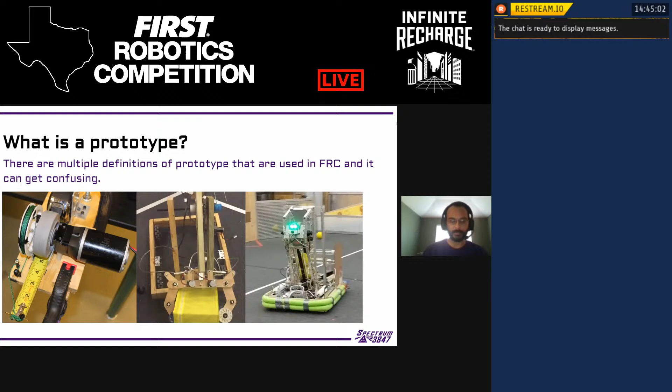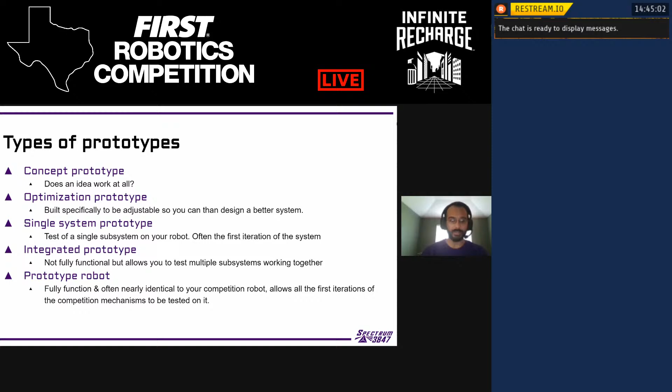So some of the different types of prototypes, when I was trying to categorize it for this presentation, when I think of different things that people have called prototypes over the years, one of the things we do for Spectrum at the very beginning of the build season is we'll have concept prototypes where someone has an idea, they think maybe that's how something might work, but they don't really know, right? We don't know if it's going to function that way. We're not trying to necessarily design something around it. We're just trying to figure out, does this idea work at all?

What can we play with to get where we need to be to then actually start working on a design and pulling forward and learning about that specific design afterwards. And we'll go through these in more detail in a second.

An optimization prototype is something that's built to learn a very specific thing about a system. So they can have a lot of adjustability built in, and you can set variables and things. They look very different than what would be on a real robot because you might have a wide range of adjustments and things. And it's kind of like a test fixture or test jig.

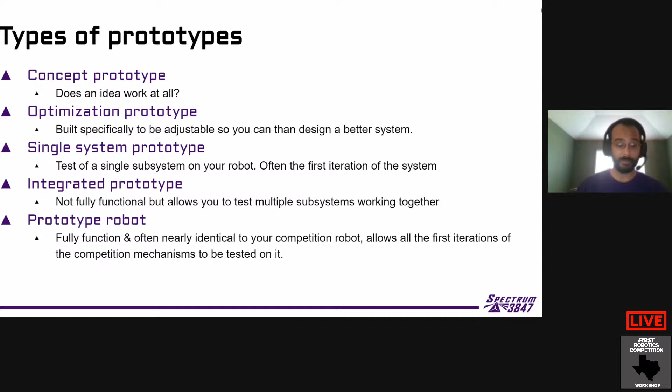Single system prototypes start looking more like something that would actually be on a robot, but they're often built faster, they're built quicker. An integrated prototype is going to have multiple systems connected together. And then the full prototype robot is normally like a full functioning robot. It's just not built as well as your competition robot.

So for a concept test, a lot of times you're doing things that you're not putting a ton of thought or planning into as much as just trying to get something done so you can learn about the system quickly. Yeah, just trying to get a general feel for the problem. You're not really designing in a ton of adjustment. You're not planning to use this for very long, right?

It may be something that gets put together one day, tested the next day. Maybe a few minor adjustments get made to make sure whether it works or not, especially if it doesn't work the first time, which most of the time it won't. But it's not going to be something that you're really collecting a lot of data for. It's not like a scientific instrument at all.

This is our 2013 frisbee launcher as an example of something I would consider a concept test. There had been some videos of other shooters tested that were all using pretty large wheels. They were using like 6-inch or 8-inch pneumatic tires to shoot these frisbees. And part of what we were hoping to be able to design was a smaller shooter to fit in a smaller space on our robot. So we needed to build out a concept test to test whether we could actually launch a frisbee from the distance we needed into a goal with smaller wheels.

So one of our students put this together with basically a couple VersaPlanetaries and motors, some wood, and a little bit of Lexan that was just scrapped from other projects, right? None of this was cut to precision. None of this is really mounted all that great. There are a few measurements to make sure the frisbee is going to touch the wheel and things like that. But there was no CAD, there was no planning, nothing like that. There's no base for it.

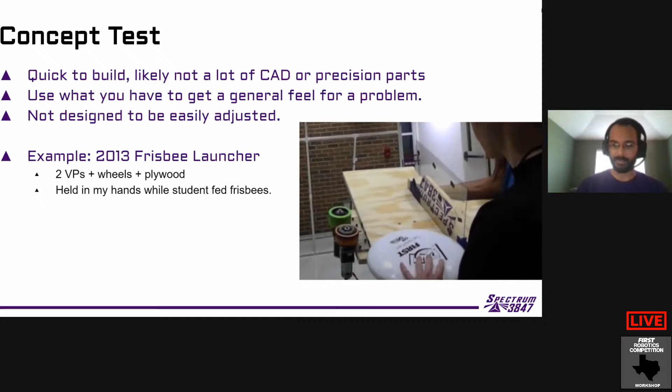I'm literally in this picture just holding it in my hands while a student feeds a frisbee through. And I think the motors are just running at full power. There's no speed control at all. So with a lot of these things, there's not a lot of finesse in the concept test. We're just seeing if it works.

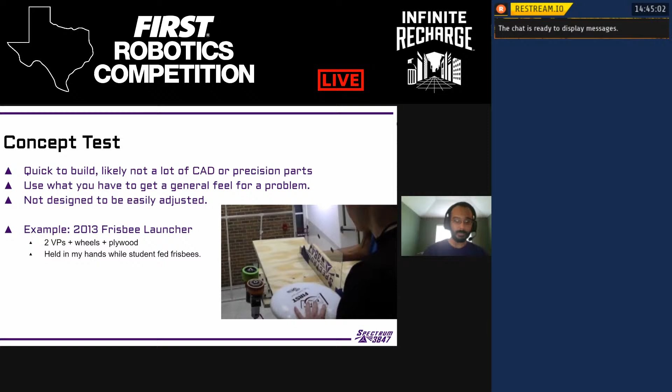The next level up from that is more of an optimization prototype, where we're trying to test a number of different variables and finding which one of those variables is going to lead to the best results, or at least get us closer to the best results. One of the most common things you're testing with an optimization prototype is something like ball compression. It's very hard to just intuitively know exactly how close your wheels need to be together in a shooter or in an intake. How much can you squeeze the ball and pick it up?

So often you need to test that, but it would be very annoying if you tested at 6 inches and that was okay, and then you had to build a whole other version to test at 6.5 inches, and a whole other version to test at 7 inches. That would be a really slow process. So some sort of optimization prototype, test fixture, or test jig allows you to design in all of those ways to adjust those variables.

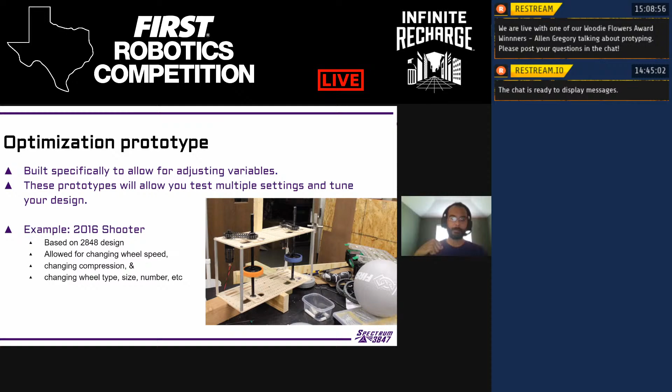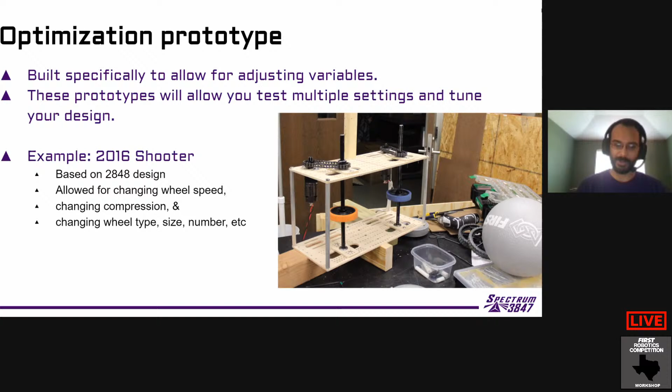This example is a 2016 shooter prototype that we built. It was based on a design that Greg Nadell did for 2848 at the time, I believe. This is a while ago, so I think that's all correct. And it allowed us to easily change wheel speed. We had 2 VersaPlanetaries mounted on there, so we could change gear ratios, but we could also change sprocket size up at the top. So those are those chain paths.

And there were slots so we could move the motors around to get the chain tension right. So even if we swapped sprockets, we could still get chain tension reasonable for the prototype. And then the hex shafts running through it allowed us to very easily change the wheels. So we could pull the hex shaft out and put a different wheel on.

We could put multiple wheels on. We could change the spacing between the wheels. And we could also change the diameter of wheel because we could have a different wheel size. And the way the bolt pattern is set up, you could change the distance between the wheels, I believe on like 1/4-inch increments going out. So we could have 5-inch compression, 5 1/4, all the way out to however much we needed for that test.

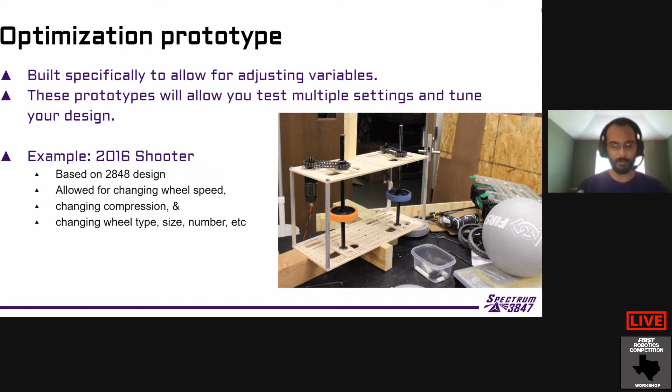We ended up not building a horizontal wheeled shooter, but that test fixture kind of allowed us to do some of those testing things and kind of get in the right ballpark if we wanted to end up building that. As we move up, you get to things that are much closer to what they would really be like on the robot. These are like our single system prototypes.

This is what on Spectrum we have. We divide up into subsystems that we have either a person or a pair of people working on. They're kind of leading it, managing that whole process, and so they'll manage their single system prototype pretty early. That's one of the big milestones of the project, getting to a single system prototype, and seeing how well you can get that to function nicely and what you can do to test it.

A lot of the critical geometry is going to be similar to what you would expect to find on the robot. So in some of the other optimization tests, you're building out a pretty wide range, right? You don't really know what's going to be on the robot. Here, ideally, you have already figured out something close using some other test method. So you're building something that you don't think you'll have to change a huge amount.

Ideally, maybe the roller's a little tight in your next version, you expand it a little bit, but it's not going to be 2-3 inches off. It's going to be within some small range of adjustments. It's also similar to how you package it on the robot. So the example is our 2019 cargo intake.

It definitely looks a little odd here, but we had to build up a geometry out of wood and things. A lot of these panels were all replaced by Lexan, and they weren't mounted the same way on the competition robot, but largely everything is in the same place. So all the rollers are the same distance apart. They each have their own motor that's able to spin them.

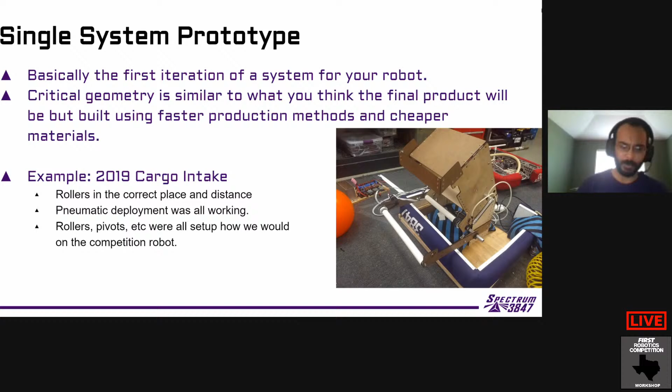Another type of prototype is more of an integrated prototype. So when you're trying to figure out how multiple systems are going to work together, and not each system has to be at the same level of complete. So in this example, our 2018 intake, one of the things we realized was we were building this big arm that was going to come over and be able to intake on both sides of the robot, and the intake would have to be in this different angle position.

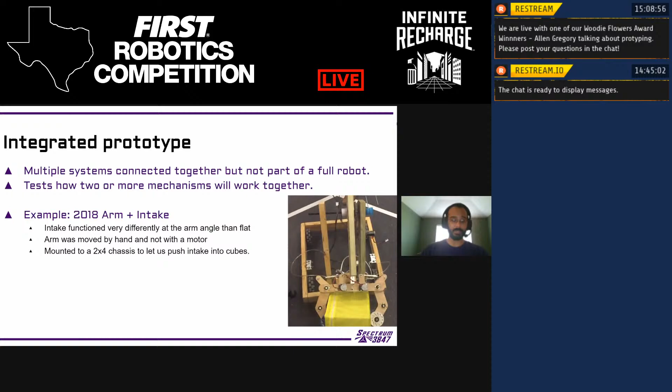So we were able to build up this very quick chassis. It's just made out of 2x4s. It has some bolted in shafts that we put Omni wheels on, so we could roll it around. We could push the whole thing into the cube to test how the intake worked by actually mimicking that we were driving it into the cube.

And then we could take our hand and move the arm. So we could flip the intake over to the other side, see if it worked reversed, see how well it picked up the cube, how much it held the cube. So we could shake the arm: was the cube going to fall out of the robot? And we could test all of those things. So the intake itself is pretty high fidelity. A lot of those panels ended up being very similar to what we cut out of polycarb for the real one.

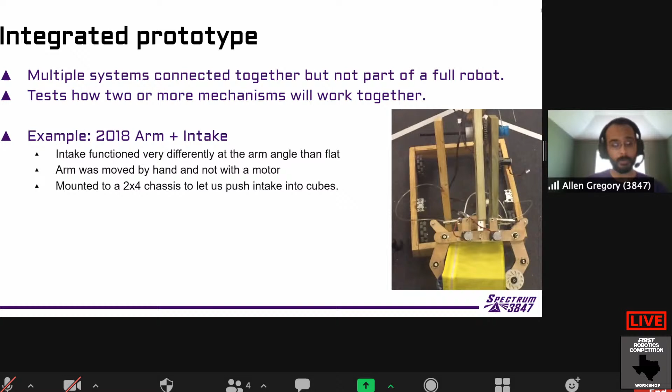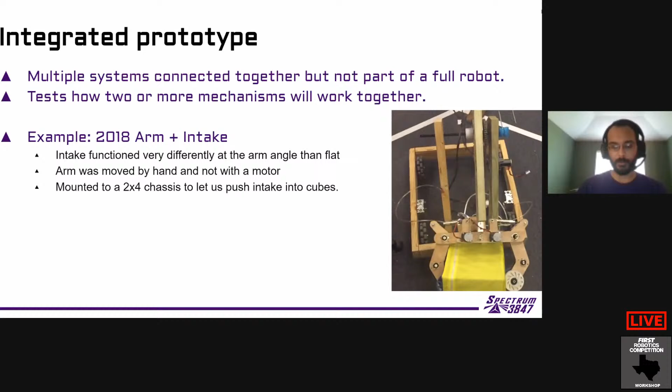But the arm and the chassis are all very low fidelity. They don't look much like the robot actually looked. They're the same general shape and size, but we weren't too worried about getting everything right there because that wasn't what we needed to test, right? We needed to test that intake angle and all those things. So that part we did get right as much as we could, and tried to make sure that the intake was going to work the way we wanted it to.

And then the full system, everything, is a full prototype robot, which doesn't always get called that. Sometimes they're people's practice bots, but some people also build their practice bot after they build their competition robot, where this one specifically is used for a lot of testing. So this was in 2020, one of our first years of basically intending to build a prototype robot. It kind of happened mid-season.

We were building along and we realized there were a lot of things we needed to get fully built into the package it was going to be on the robot to be able to test properly. And we needed to do it quickly without waiting on the competition robot, which always takes a little longer because there's paint. The electrical is always much nicer on the competition robot because we're way more worried about reliability there. A lot of the parts take longer because they're made out of materials that take a little bit longer to machine sometimes.

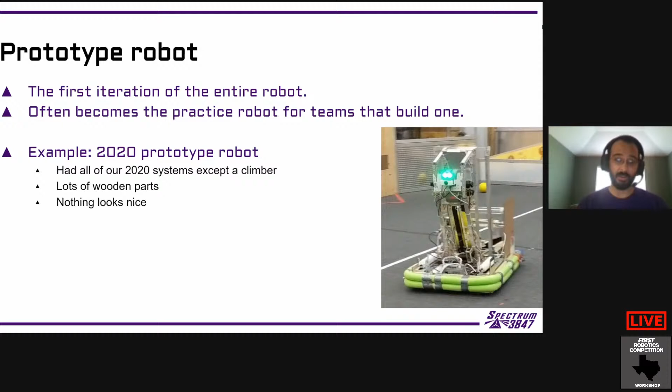But this prototype made our competition robot way better because we could test the full integrated system and make sure our shooter was doing what we wanted. We could build multiple versions of the hood onto it. We could do a lot of things on the full prototype robot that would have been a lot harder to do with just an integrated prototype. Some of it would have worked, some of it wouldn't. So having it was very useful this year.

Okay, so we're going to go through some of the general concepts now that we have an idea of the different types of prototypes.

So I think I may be misquoting, but I believe there's a JVN quote that is something along the lines of, you don't have to prototype everything, just everything you want to work. And that is largely true for a lot of systems, right? I would never want to design and produce an intake and just take it to competition and assume it worked. Anything that's going to interact with the game piece, anything that's going to interact with a lot of the field, it's going to be very hard to do that.

But there definitely are times, and there definitely are times for different teams, where it does not make sense to prototype. So if there's a problem that you and your team understand very well, and you're confident that your first version of the final design is going to be sufficient, that you can tweak from there without having to very quickly replace the whole thing, right? That's ideally what a prototype is doing.

So you don't have to completely overhaul your actual competition robot, which normally costs a lot more, takes a lot more time, and you can do it out of quicker materials and things. That's why we do a prototype. For things like an elevator, it may not be necessary to build a wooden elevator or something like that, right? As a team, you have to decide, what is this prototype going to really teach you or help you learn or change about your final design?

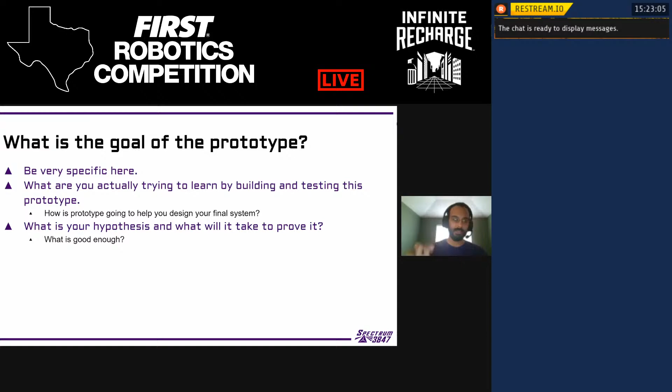Because there's tons of ways to intake a ball, right? But you have to figure out, okay, this prototype is going to be designed to make sure we can intake multiple balls at once, or that we can intake balls into a specific part of our robot, or that we can do it at this speed. There's all sorts of different things you can start listing, right? Some of that is in your strategy discussion that happens at the beginning of the season when you start figuring out what things you want your robot to actually be able to do.

Just building an intake prototype is normally not the right answer, right? You need to be building an intake prototype that does what you set out to do and proves what you set out for it to prove. Kind of along the similar thing of knowing what your actual subsystem and what part of your robot is going to actually, what design requirements and design constraints is it going to actually have to meet, right?

There are game rules and robot rules. Your build schedule, like how often do you meet, all those things. You could design in CAD an awesome prototype, but if you don't meet often enough, or don't have the right tools, or don't have the right materials, or it's just too late in the season to do it, there's all sorts of reasons why a prototype may not be useful if it doesn't meet the constraints you have across both the robot itself, but also your team.

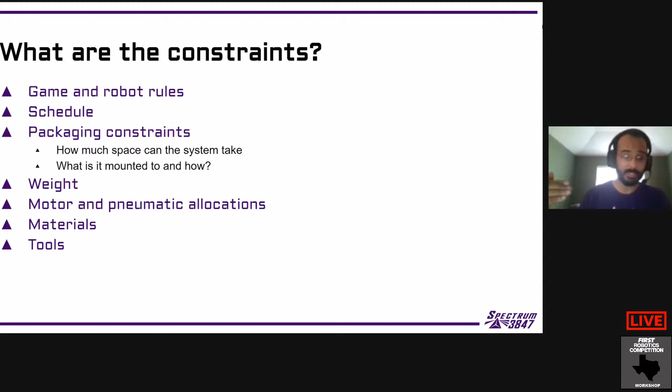Right? There could be an awesome climbing system, but it ends up weighing too much. So then that prototype wasn't useful because you weren't looking at the weight constraint for how much weight you actually have to be able to put this climber in place. Motor and pneumatic allocations are a similar way. If you don't have enough motors left over on the robot for your system, it's not going to work out, or you may have to change another part of your robot to change some of these constraints, right? Maybe your prototype can't get down to weight, or can't get down to the packaging constraints. Then you may have to move something else or change something else to allow it to work.

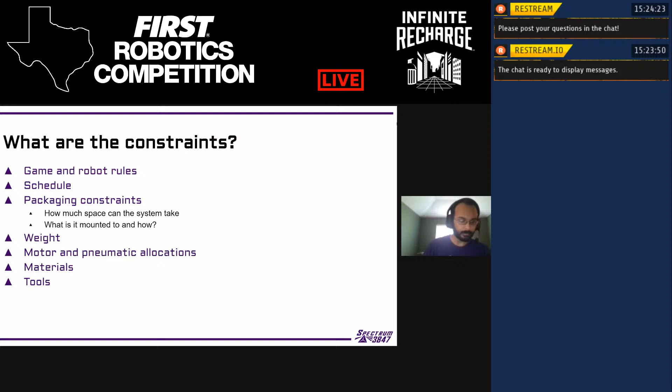Okay. This is probably one of the ones that I think not necessarily a lot of teams, but a lot of people miss with the idea of it being attached to prototyping. Because a lot of people do this type of thing kind of early in the season. Well, they definitely will look at a different robot, right? It's a shooting game in 2020 and 2021. So a lot of people did look at 2016 robots or 2012 robots and we kind of saw these different examples, but they may not have done a lot of research into the specific prototypes that were built from those years, right? How did they go about actually doing the testing, not necessarily just what their final product looked like?

There are a lot of examples of those types of things in old Chief Delphi threads, and a lot of teams will talk about them in some of their videos. So watching some of their final robots also helps. So things like the Behind the Bumper series that Fun does, those have a lot of detailed looks into different robots. So you can see kind of different designs. Tons of teams post their CAD models.

Recently we collected a lot of them in a Google Sheet. So if you go to cadcollection.spectrum3847.org, you can see, I think it's like 800 something robot CAD files right now. So you can dig through a lot of old robots and see how they build their robots. So you can get a lot of information without actually having to build a prototype first, right? Or even do a concept test, right?

If you can find somebody else who's proven out the thing you're trying to learn for you, you don't have to do the work. And then your work and your energy can be put into improving it and iterating it and making your final design better. A lot of published examples, things like the Open Alliance, which Spectrum is a part of, and a lot of other great teams where we're putting out kind of a lot of what we're prototyping each season, our final designs, all sorts of resources for you.

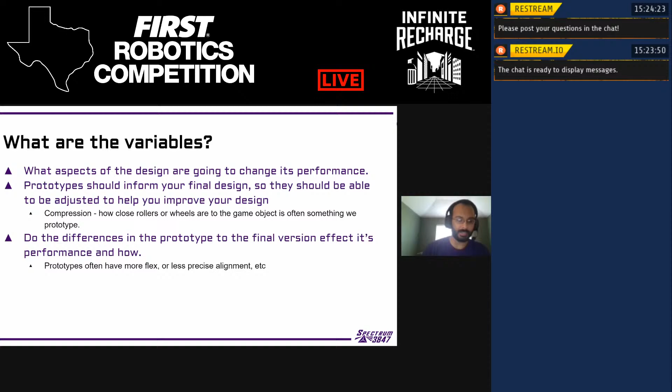So you really want to notice whatever the differences in the prototype are compared to the final version: is that going to affect its performance, and how? Flex is a big one. That's one that bit us this year, and we had to do a lot of tweaking on our hood pretty late in the season to get it right.

There's a lot of less precise alignment if you're not putting things together as accurately and as well as you would on your final version. A lot of little things can be tweaked on a prototype that aren't going to transfer to the final version, and that may cause you to not get it right.

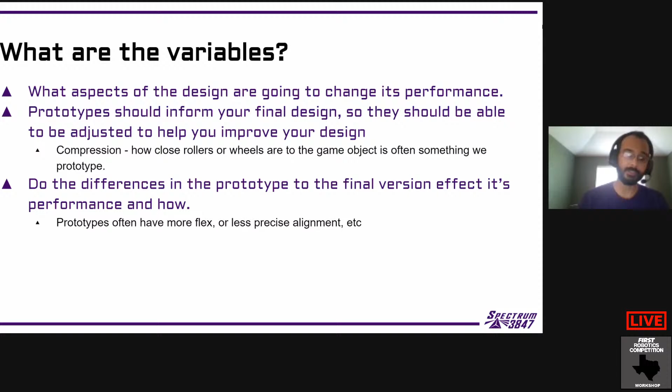In general, for your prototype, you're finding good, not perfect. Because there are going to be differences, like I said, there's going to be flex, you're not building things of the same materials all the time. If there is something that needs to be kind of perfect on your robot, you probably need to design some of that adjustability into your robot.

So you can design it to where you can change your shooter speed because you have different settings in the control system, or you can change your hood angle in some way by dialing something in. You can change hard stops and things to change exactly where your intake falls. There's all sorts of little things you can do to tweak your final version if there's differences between your prototype and your final version.

But you definitely have to think about those during the design process of your final version to get it right, to know, okay, maybe the prototype isn't quite right. We'll be able to tweak this a little bit in this range of values, but the prototype's close to right.

Another very important thing, and I feel like this is also one that not a lot of teams do all that well, even with all the documentation we do, we don't do it as well as we should. Documenting the prototyping process, making sure you have good photos, videos, and a lot of notes from the time you're actually doing the testing, along with those measurements, helps a lot, especially later in the season.

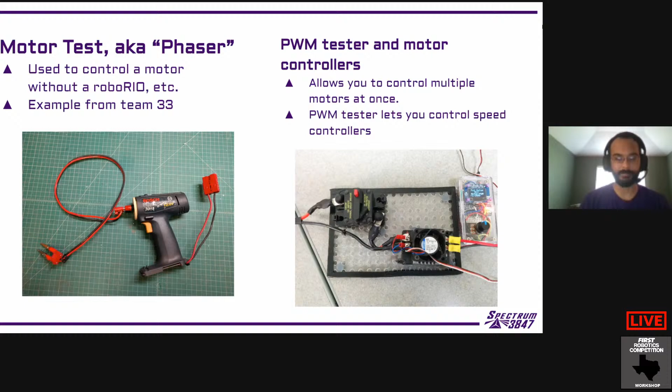So we use that a lot for shooter testing. So if we just need to be able to lower or speed up multiple motors attached to a shooter, we'll plug that in, and it has 3 speed controllers on it. We can just turn a dial and set our speed pretty easily. And most of it's all used parts plus the $10 servo tester or whatever it is, which allowed us to build that up, and we use it basically every season for something.

Another one is a pneumatics test panel. So having some way to test pneumatics functions. So if you are building and prototyping an intake that's going to fold down over your bumper or something like that, you want to be able to quickly have a solenoid that you can control back and forth and push air down or let air up, right?

Because if you build an intake that in an actual match is going to come down with air and be held down with pneumatics, but instead you build it completely rigidly, now that joint that would be moving up and down can't at all. So it's going to intake differently than if it actually had the same pressure pneumatics pushing it down over a bumper like it would be on the real robot. So again, you want to get that fidelity right. So one of the ways to do that is to use the pneumatics there and test the whole mechanism.

A lot of the solenoids will have buttons you can just press, so you don't have to have them set up to anything with electricity. You don't have to have a PCM or anything. You can just get the compressor running, get it charged to a state that's reasonable, push the button, and the pneumatic will move in and out.

We'll often also use an old robot, even like last year's competition robot. We know it's working well. We'll unplug, we'll get an air line from it, get a solenoid, and plumb it that way. So we'll have last year's competition robot running up on blocks somewhere. We'll turn it on, and we can test just using that as the air line.

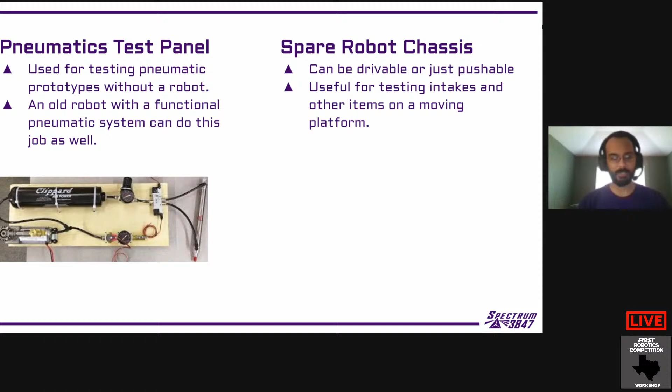So even if you've ripped a lot of the electronics off of past robots to move on to next year, you can keep the frame and some of it around. Even if you take gearboxes off, if it has wheels, you can push it around and it can still help you out.

Okay. A couple of the more recent tools that have been developed, one of which we'd started working on 2 years ago, I want to say it was in the fall of 2018, is Spectrum Protopipe. I'm not going to go into all the details, but if you go to protopipe.spectrum3847.org, you can see the full document and it explains it. It has all the downloadable files, so you can 3D print the connectors.

But basically it is a system of 3D printed connectors that allow you to connect PVC pipes with either wood screws or clamps. And you can very quickly build up different prototype concepts and different concept tests, or tests for different variables and things too.

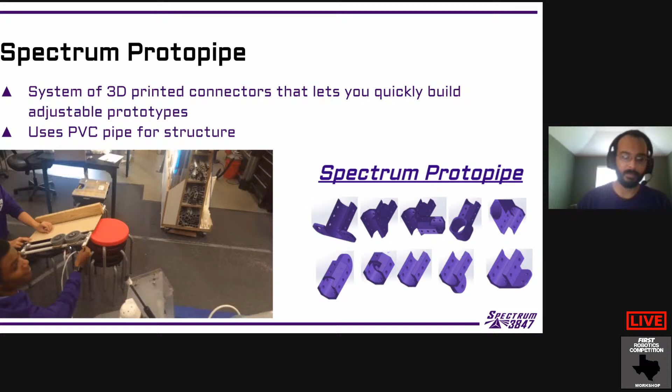This 2x4 back here is actually on rails as well, so we could slide it if we want to change the compression. So you could do a lot of different changing on the shooter without having to build a new one. You could start learning more about the problem here.

Another example, this one was built up to mimic the 2010 game, FRC Breakaway, where you had to have a soccer ball in your robot, but you weren't allowed to actually bring it in your robot. You just had to roll it, or you had to have it in the front of your robot. So we had two different rollers here. They were just powered by drills, so we didn't even have FRC motors on these ones. And these pipes are just spinning in those connectors. So we could get a concept test built up relatively quickly.

We had all the parts ready. We have a big bin of the connectors printed. They don't cost very much; they're just printed out of PLA. And so we can get this test fixture set up pretty quickly, or we can do some of the adjustments on it. You can slide these different bars into different dimensions, slide them to different heights, and start figuring out the problem a little bit through this. Then we might need to build something a little bit more robust to figure out the exact variables everywhere. And then we would get into our first iteration of our system prototype as well.

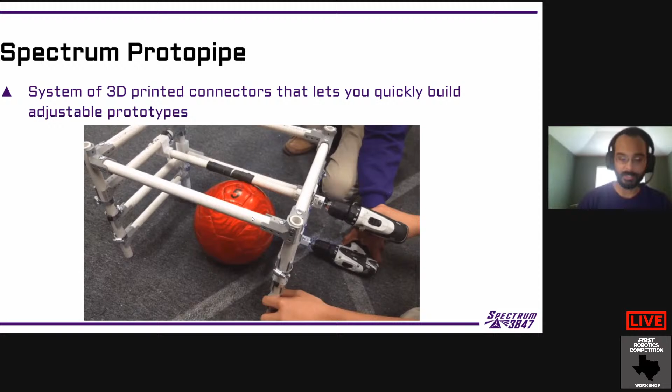Another very cool 3D printed project is called HYPE Blocks, from 5254. They have a mentor, Max, who helped design these. We used them this year for a shooter concept. We needed a prototype to let us spin up multiple different wheels and get everything actually spinning up to velocity. And this way the HYPE blocks have better bearing setups and can be a little bit more rigid on the 1x1 aluminum extrusion.

So again, a lot of the prototyping stuff doesn't have to be expensive. We had a 2x4 frame that we built up, just 1x1 extrusion, and some clamp pieces. All of this was being controlled by a past test chassis that we had, because we needed to have brushless motors. So there was actually some code involved with this prototype because we wanted to get good wheel speeds. So we were doing velocity control on these wheels during our shooter testing, even just this initial testing,

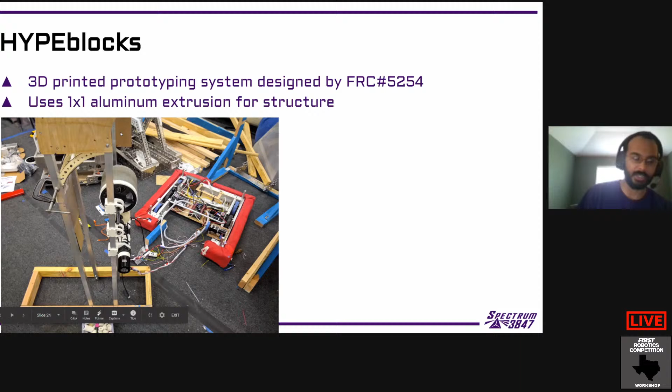because we wanted to make sure that the inconsistencies weren't from the wheel speed, but were actually from whatever our setup was. So we wanted to be able to test and tweak our setup and figure out ball distance and how the balls were shooting and everything else through this setup. And this was not the best prototype. We could have done a lot more to make this better, and we did. This is one of the earliest versions. I think we added quite a bit of stiffening and changed the back and changed a lot as we were developing this.

Kind of an example prototyping material. Again, finding a system that works for your team is a lot based on what tools you have, what material and things you have available to you.

This kind of example over here is actually one of our initial 2020 shooter prototypes. This was the shooter off of our 2017 robot that we kind of hacked up and got to a state where we could power the feed rollers and we could power the main drum. And we actually ended up changing them a little bit, because we ended up with these plywood mounts out here. So we had to change how they were mounted to get them away from some other part of the ball, I think. And then we added some sticks of aluminum and clamped them to this cube of 2x4.

So the setup doesn't have to be super precise necessarily to get an idea of what we're trying to learn. Because all this test was doing was seeing how the balls flew in the air. I want to say we had this up and running early in the first week, because we just wanted to know, okay, how do these balls interact with shooters? What can we do with angle and velocity, and how far do they fly? We hadn't really played with those specific balls yet. So we knew that this wasn't going to be what our actual competition shooter looked like, but it was good enough for the initial tests, and we could get it done faster than building up anything else.

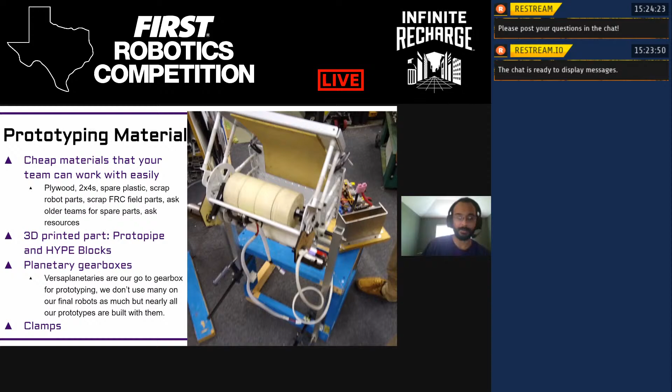Lots of sources for parts and material to use for prototyping, since it doesn't have to go through an entire competition season. A lot of the wood we'll use is this really cheap 5mm underlayment that I think Home Depot sells. It's like $13 for a 4x8 sheet or something, and we'll cut out all sorts of stuff out of that. It snaps pretty easily, but it normally lasts for the life of the prototype.

Okay, some last tips before we take a few questions. Slow motion video can be very useful, and a lot of teams have had really good success with it, especially if you're getting some very specific details right in a lot of your tuning. You probably aren't going to use slow motion video on some of your initial concept tests, but as you're actually tweaking some of your subsystems, especially shooters, getting 120 frames per second, there's cameras that can do 960 frames per second. You can really see a lot of details that you would miss in real time.

So you can see vibration and shake, flexing of different parts. There's a lot of little details you can see in slow motion that you wouldn't be able to see when you're just watching it or watching the video.

Another really cool thing that teams have done, Spectrum hasn't done this specifically yet, is to use scale models to be able to prototype faster and use less materials. So one of the best examples I know of is 125, the Nutrons, using golf balls in 2017 instead of the fuel, the pickleballs or whatever those were. So instead of a 5-inch ball, you have a 1-inch ball or something along that size.

And you can scale everything down to that same scale factor, right? So if you have a 1-inch ball, you make everything 1/5 the scale. So they were able to test their whole feeder concept and 3D print all sorts of versions of it much quicker than if they had to build a full FRC scale version of their system.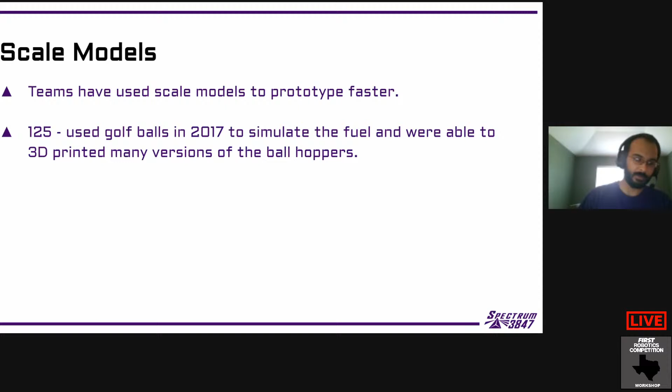Okay, so I think that's my last slide. Do we have any questions? We do not have any questions in the chat, but I've got a couple questions for you, Alan, if you don't mind. Sure. When you mentioned slow motion video, I think that's really cool. But do you have any specific hardware that you would recommend using? Do you have a camera that you like or anything?

So yeah, in the past, some of our students have iPads assigned by the school, and we've actually just used their iPads for it. To go to 960, we actually just bought a Sony ZV-1, which is a relatively cheap video camera. I think it's like $750, $800. It's not super expensive or high end, but it'll do short bursts at 960 FPS. We haven't got to use it in any testing yet, but it seems to work well enough from the little bit I've done. I think there's a couple other Sony camcorders that can do it as well.

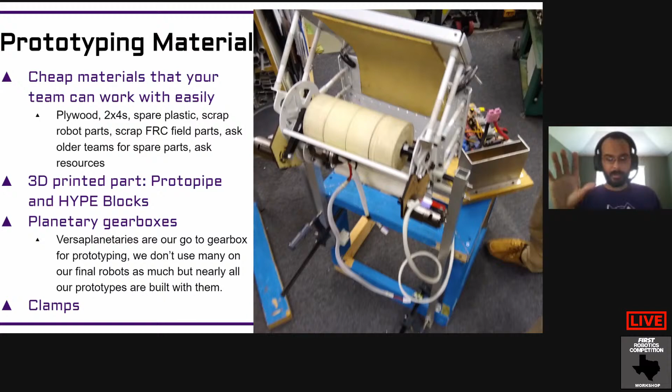Okay, that's cool. And when you're talking about doing your prototyping, do you have any special software you recommend or use to prototype? No, so a lot of the concept tests are going to be done just by whiteboard sketches and figuring out what we need to get built. As we move up, then it's whatever CAD package a team uses. So most of our stuff in the past has all been done through SolidWorks. We're kind of a hybrid team now, Onshape and SolidWorks. We're kind of in the middle. It's going to be a weird couple of years as we figure out which one we're going to stick with. Yeah.

Go ahead, Mike. Since you brought that up, I have a question because it's come up in some of the other sessions. We had someone actually ask us about doing a workshop on Onshape, because apparently this person felt there were a lot of advantages for teams using that because it wasn't as computer intensive as SolidWorks and some of the other things. I just wondered about your opinion on that.

Yeah. So that's kind of why we're in this hybrid model at the moment. Reasons why SolidWorks is useful: one, we've been using SolidWorks since 2012. So for us, there's a lot of institutional memory, right? We have a lot of systems in place. We have a lot of old CAD. So there is some effort in switching the entire team over. We also have several students who are already proficient in SolidWorks. We've done SolidWorks training, so most of our upperclassmen already know the system.

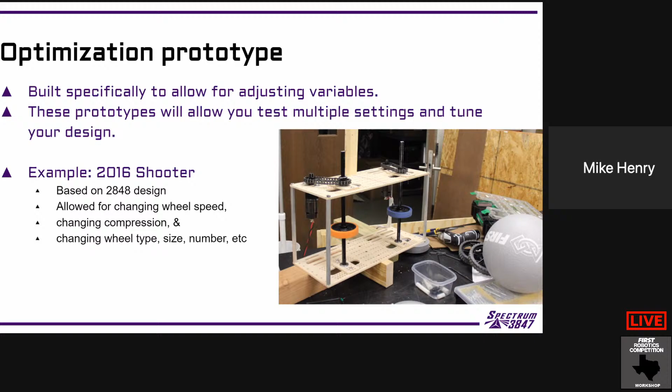For most FRC teams, whatever one they know better, whatever one they can use on their equipment is more than adequate. If people were going to start from scratch and were just asking me which one today, it'd probably be Onshape. There's a lot of tools built in now that a lot of different FRC people in the community have built up that make it very simple to do a lot of FRC tasks that used to take a while in SolidWorks.

But there are still some things that are annoying about it too in the robot design process. It's not perfect. But yeah, Inventor, Fusion, there's a lot of different CAD packages that exist, right? But most of them all do 3D modeling in a somewhat similar way. Okay.

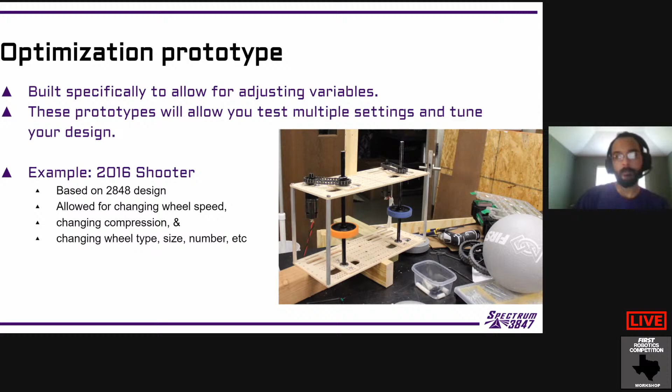Thank you. No problem. All right, Alan, that was a lot of great information. I just have one last question. Looking at your presentation, I saw a lot of common household parts that y'all would use for prototyping. For a rookie team to go into the prototyping business, which we know they need to do, is there a guesstimation on a start budget?

So a lot of that depends on what they're doing as a rookie team, and what their skill level coming in is, because there's so many different abilities as rookies, right? You have someone who's been in FRC before. Have your students been doing FTC for a long time and they're pretty confident going in? They've done CAD training. If you're brand new and nobody on the team has ever touched a robot before, they probably shouldn't be doing prototyping at all. It's not going to be that helpful because they don't even understand what problems they're trying to solve yet.

Most of those teams should be building the Everybot, largely, right? The Everybot or some version of it or some other known good concept. They should absolutely be using the Kitbot drivetrain. Way more teams should be using the Kitbot drivetrain. I should have had a slide for that: don't prototype drivetrains mid-season, even though I'm almost certain we probably have at some point. But in general, the best advice is not to do that.

Have an idea of what your drivetrain is. Build them in the fall if you want to build something cool, swerve, whatever. But if you don't have an idea what your drivetrain is, use the Kitbot. It's awesome. The AndyMark AM14U4 now is an excellent drivetrain. It works. And then from there, ideally, most young and rookie teams should be using known quantities, because you really want to get that experience and understanding of what it's going to actually take to build an FRC robot and do well with it.